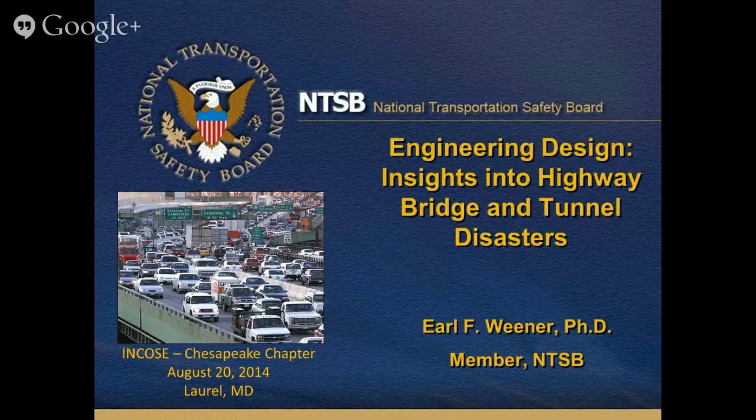Now the NTSB, let me start off with a word from our sponsor, if you will. Most of you are probably not familiar with the NTSB other than what you see in a newspaper: some disaster happened, NTSB is sending investigators. We're a small agency, about 400 people. We've got a very highly skilled workforce. We've got a lot of Ph.D.s, M.D.s, and so forth.

But as a small agency, we report directly to Congress. That keeps us a bit out of the politics. The agency is run by a collegial board of 5 board members, 4 at the moment. Board members are appointed by the President and confirmed by the Senate. We have fixed terms that rotate every year.

Somebody's term runs out, so that helps insulate us a bit more from the politics in Washington, D.C. But our charter is to investigate accidents and provide improvements for safety. So by safety, we're often thought of as being the aviation safety board, but in fact we cover all modes of transportation, as evidenced by the title here. We're going to talk about tunnels and bridges and how engineering can go awry and end up with a disaster.

So our stock and trade are safety recommendations. We don't own any regulations. We don't own any policy. We can't make anybody do anything. So the safety recommendations we come up with are put in place by arm twisting, seduction, coercion, however we can make a safety improvement. By law, we are to investigate and determine a probable cause of all aviation accidents, and significant accidents in other modes: rail, pipeline, highway, marine. So we have specialists and divisions in all of those areas. That's a little bit about the NTSB.

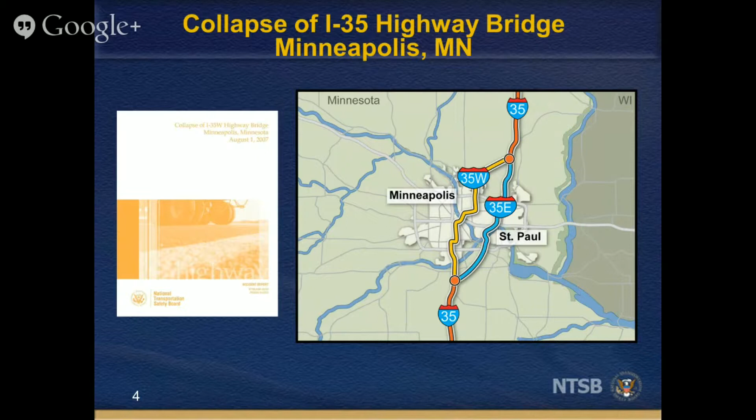Let me start with an accident that happened in 2007 in Minneapolis, August 1st, 6 o'clock in the evening. Interstate 35 West runs through Minneapolis along with 35 East. It runs right near the downtown district. The bridge over the Mississippi River at that point is what we're going to talk about.

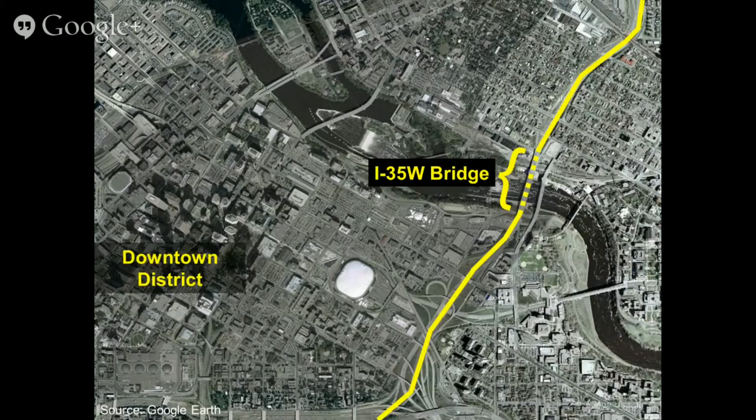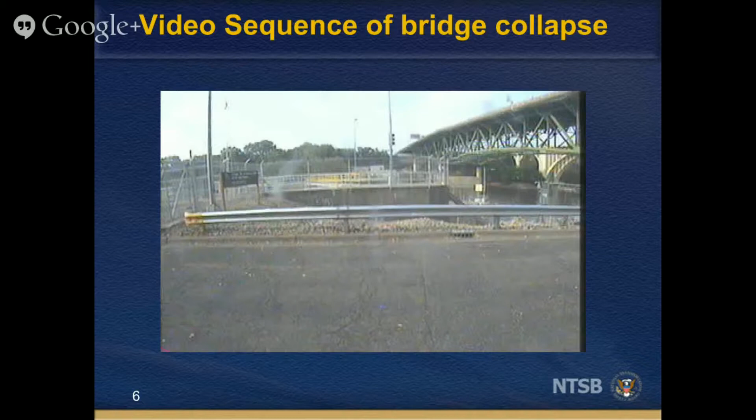Unfortunately, when I tried the presentation, it looks like some drivers got misplaced, so I can't play a video. But we were fortunate enough to have a video that started just after the bridge began to move and followed it through the river. Let me point out one thing: as you look at the shape of the bridge, notice the little dip here — that's where the collapse started. That's the part that is falling initially, and we'll talk about that in a lot more detail. This camera was a surveillance camera; we don't often have the good fortune of having this kind of information.

This is what it looked like. The bridge overall was about 1,900 feet long from the approaches to the north all the way to the south. The center section that fell into the water was 456 feet long, and it fell 115 feet into the water. But you can see other parts of the bridge, particularly those parts that were on rollers for thermal expansion. Those parts kind of folded up or fell over.

There were 13 people who died, 145 people who were injured. There were 111 vehicles on the bridge at the time of the accident. 17 of those were fished out of the river or were on the part that fell into the water itself.

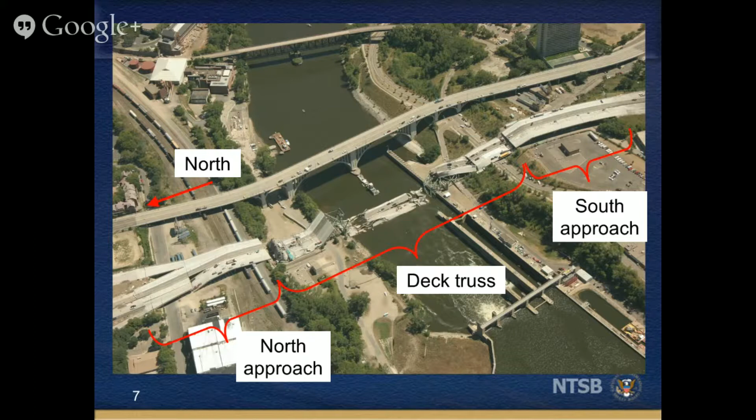The center section of the bridge, basically the center half, you have a quarter in the north approach, a quarter in the south approach. The center half is about 1,000 feet long. That's the section that's the truss bridge.

Now, let me talk a little bit about truss bridges. In a pure truss bridge, all of the components are either in tension or in compression - pure tension, pure compression. In an ideal truss bridge, all of the connections are pin joints so that there's no bending moment transferred from one to another, so everything is purely compression and tension. With a large complex bridge like this, you can't really do that, so you have what you call gusset plates, which you bolt or rivet the diagonals and the verticals and the chords to, and so you get some secondary transfer of moments in that process.

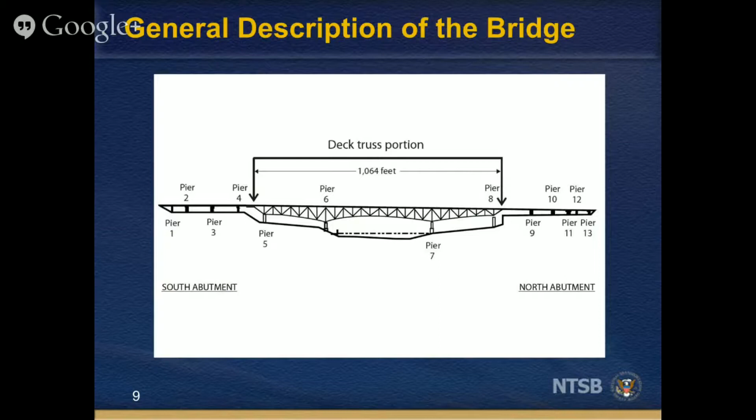There were 13 piers, 14 sections, but as you can see, the biggest section in the middle, the 500-foot long section, is one truss span.

The probable cause, as you can see here - and I'll talk in more detail about how we got to that probable cause - is the inadequate load capacity due to design errors in the gussets at the U10 connection, which I'll define in a moment, by the engineering consulting firm responsible for the bridge design. The failure was substantial increases in the weight of the bridge resulting from bridge modifications, as well as traffic and concentrated construction loads on the bridge the day of the collapse.

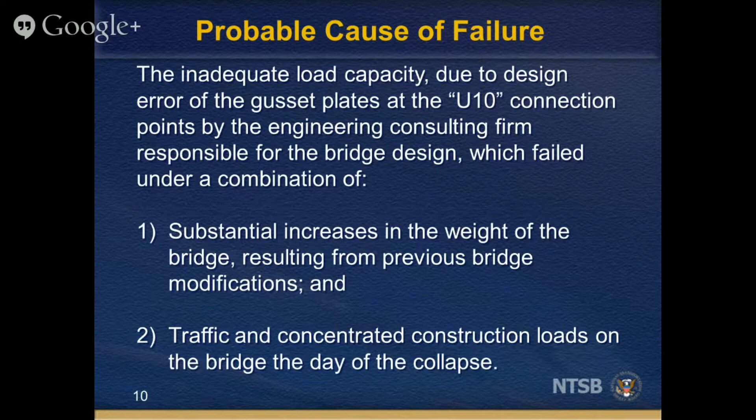Contributing factors: the design error wasn't caught by the firm's quality control. The gusset plate calculations were assumed - they weren't made. I don't know how many of you have encountered situations where you assume something is adequate strength or adequate capability, only to find out that that's the one thing that bites you.

Contributing to the accident was the practice of giving inadequate attention to gusset plates during inspections and excluding them from load rating analysis. I'll show you in a moment some pictures of gusset plates that were bowed, which should have been a tip-off that the plates were not within the design loads.

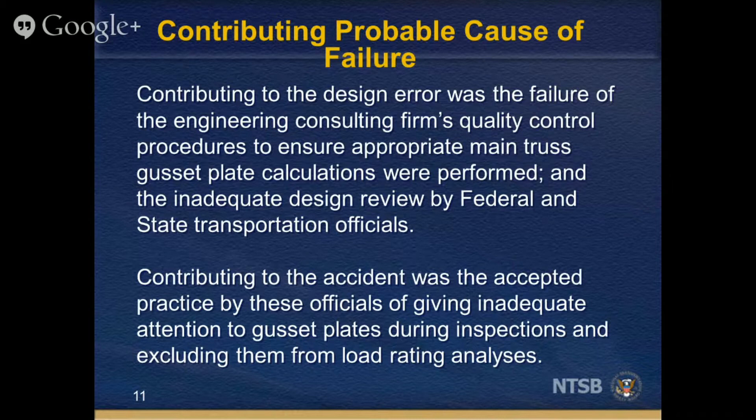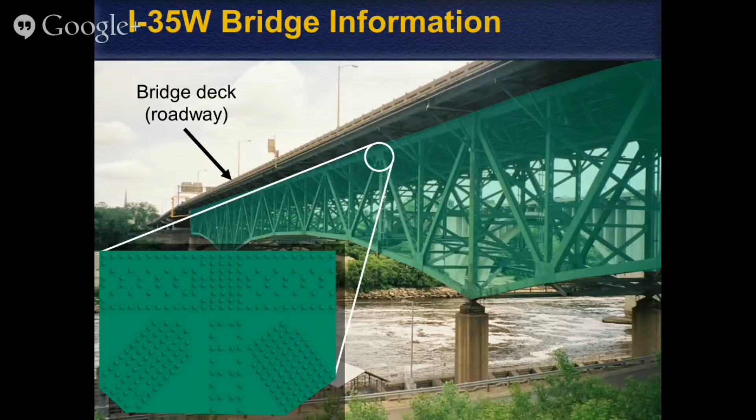This is just a bigger picture of the gusset. The gusset on this bridge - this is a piece of steel that's about 9 feet in width and about 6 feet in height.

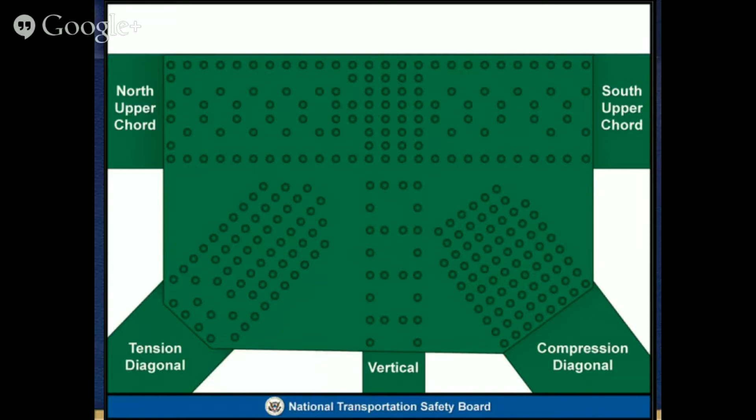Now the bridge was initially designed in '64, put into service in '67, and 10 years later they decided that they needed to provide some more protection for the rebar in the bridge deck, so they added 2 inches of concrete on top of the roadway that they had. That was about 3 million pounds, which increased the load on the bridge by 13%. Kind of creeping requirements - you've never encountered that before, I'm sure.

In '98, they had to put some improvements to the medians and the barriers on the outside railings. That added another 6% to the dead load on the bridge. So now you've got about 20% more load on the bridge than what it was initially intended to have. Obviously, there was some design margin in there, but by the time the accident happened, the traffic on that bridge was more than double what it was intended to have.

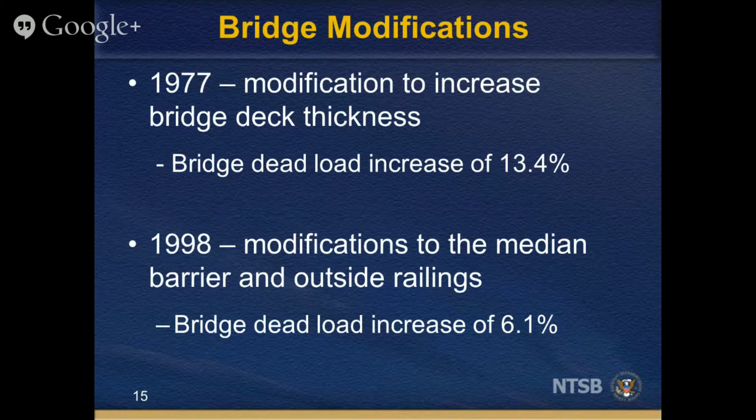In the particular case of the accident day, they were again working on the roadway, milling 2 inches of concrete off and replacing it with 2 fresh inches of concrete. So they had parked or accumulated on the bridge span about 300,000 pounds of aggregate, stone, sand, cement, and another 200,000 pounds of water, trucks, personnel, and equipment. So they had quite a load on that bridge.

And by the way, notice where that sand and gravel is, right over node 10. Now, somebody had asked, is this okay to do? And the answer was, oh, sure.

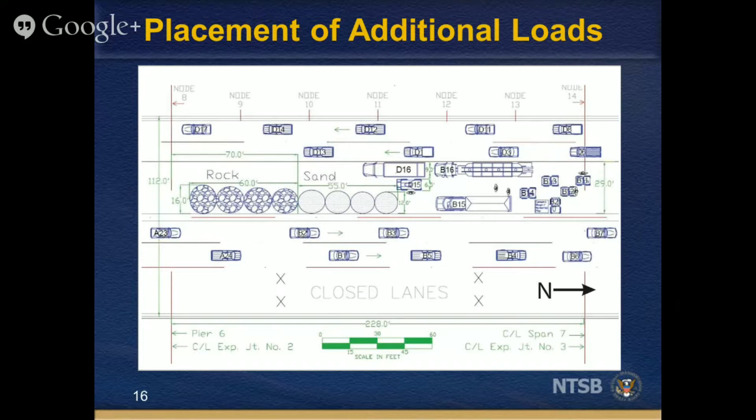So that's the setup. You've got rush hour, you've got 2 lanes closed in both directions, so you've got the rush hour traffic plus all of this aggregate on the bridge. This just happened to be taken that day of the accident. One of the police helicopters or traffic helicopters took the pictures, so this allowed us to verify basically what was on the bridge.

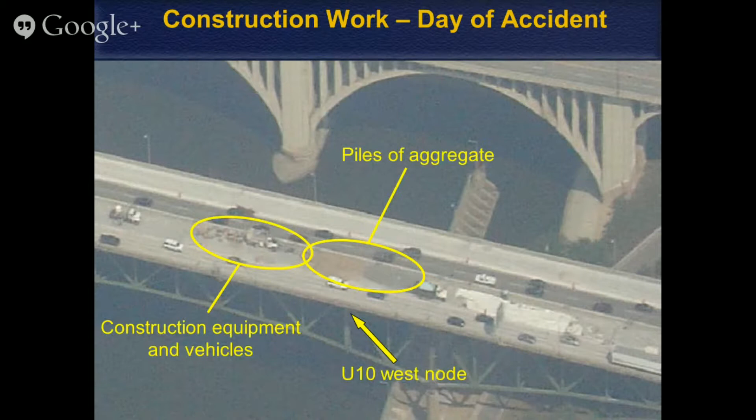The gusset plates were assumed to be strong enough, and that was pretty much standard practice in civil engineering for bridges at the time. Gusset plates were always assumed to be stronger than the members that they were tying to.

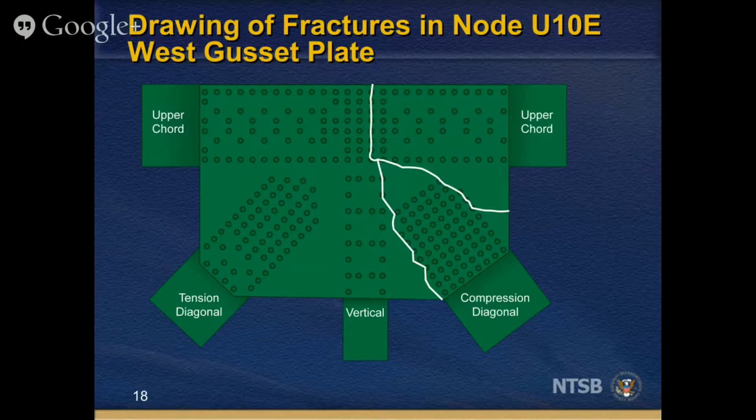So this is the initial compression failure, tension fracture. Now, one of the things that was not done was any sort of analysis of the gusset plate. We, at the NTSB, decided to do a finite element analysis of it. So along with New York College, Federal Highway, and Dassault Systems, did a finite element modeling of the gusset plate.

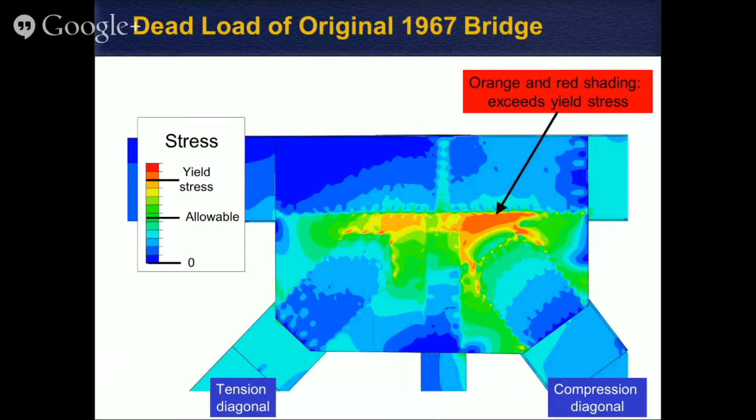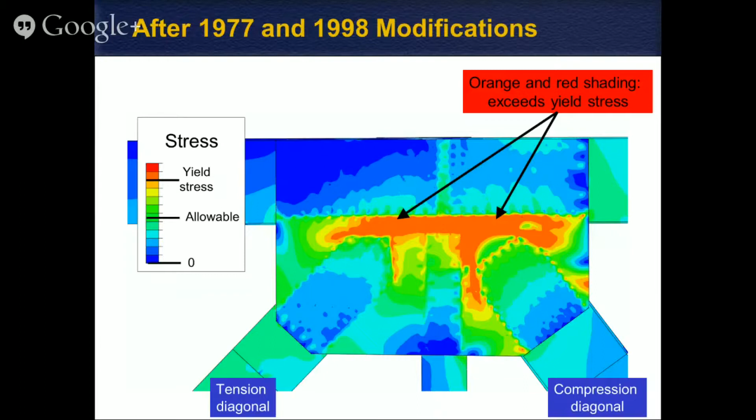But if we look at after the 1977 and '98 modifications, which added about 20% dead load onto the bridge, you can see how this is turning into basically a plastic flow in this area of stress, exceeding yield stress. Now, if you add the loads at the time of the accident, you see a very large area, and you see it coming down to the sides and going off to the edge. And by the way, there were no edge stiffeners on this. This is just a half-inch steel plate, so nothing keeping it from bowing other than just the integrity of the plate.

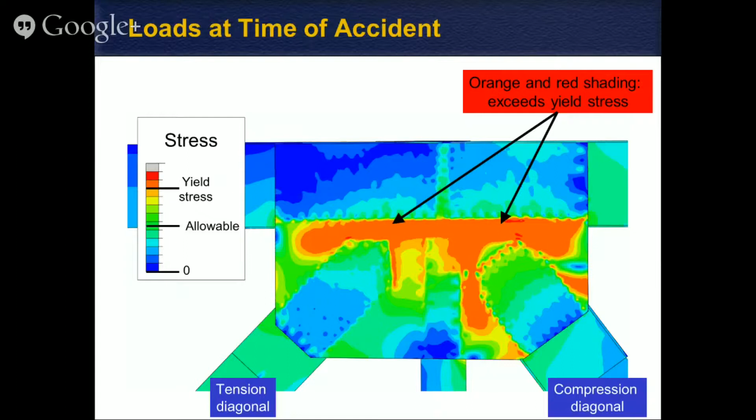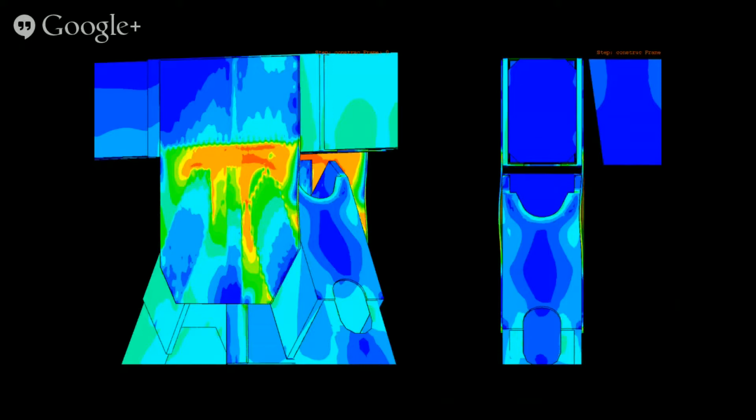So this is the area that gave way. If we look at it from the side, basically this is a diagonal, this is an end-on view. Notice the gusset plate here has started to bend. And of course, once it starts to bow, it's lost its structural integrity.

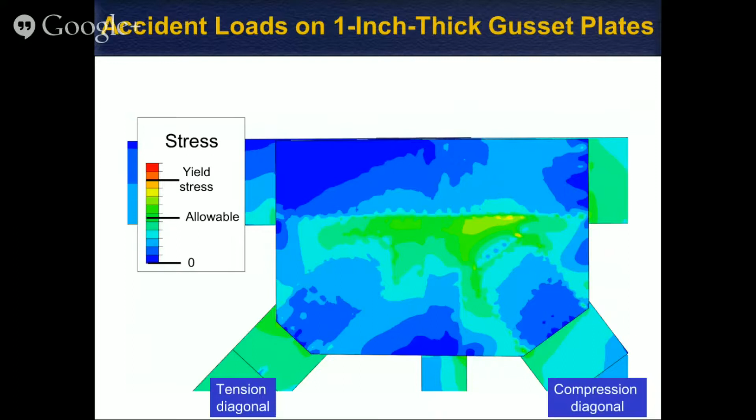Had it been 1-inch thick instead of half-inch thick, these would be the loads at the accident time. This is what it should have been. Again, this was an assumption that half-inch gusset plates were thick enough. In some places, they used 1-inch thick gusset plates. This particular one, they didn't happen to do that.

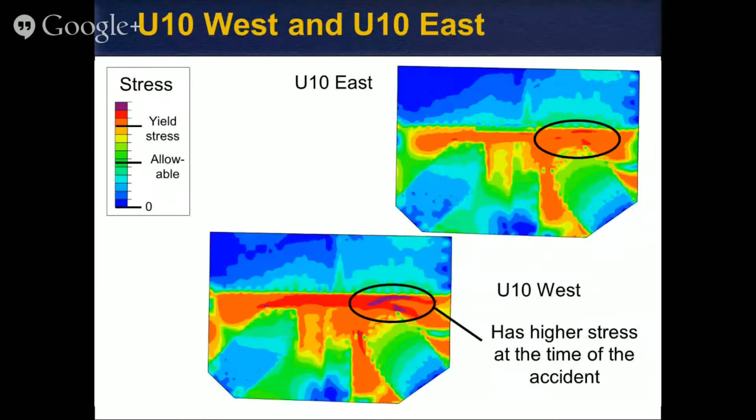Now, as I said, this is the upper 10th node, east side and west side. The west side is where the aggregate was placed, so that had a higher load. And you can see here where the load was, in fact, in the plastic flow. That's the highest stress.

So this is what happened. That moved to the side, that caused it to buckle, that then caused the whole bridge to pull away, and the whole thing came down. The fact that there were not more fatalities is really astounding.

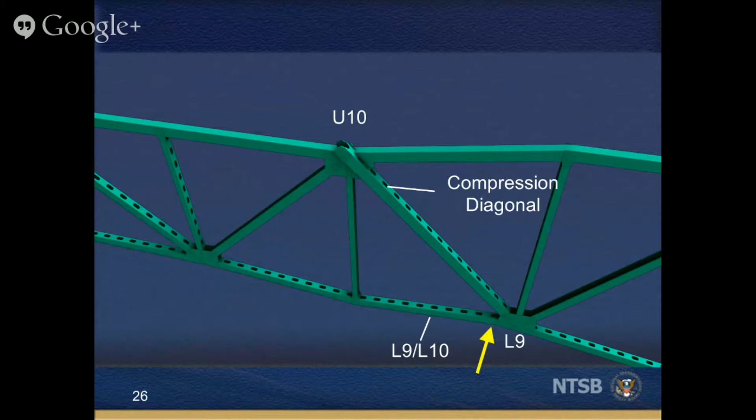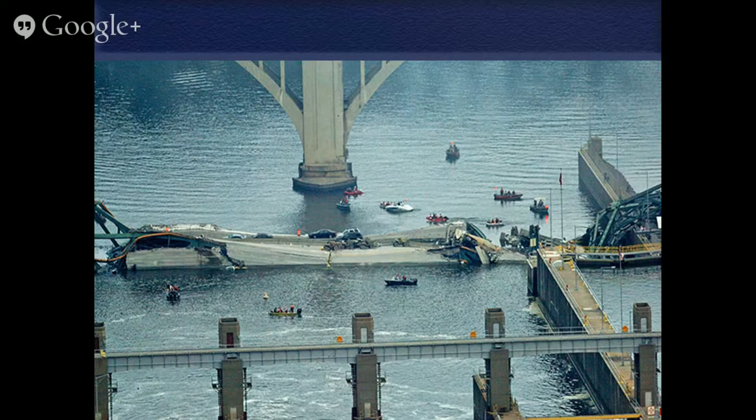This is what it looked like. There were 17 automobiles either in the water or on this section of the bridge. And the 13 fatalities occurred in this area.

So how did the bridge get designed this way? There were plenty of people who had design standards: the Association of State Highway Officials, American Association of State Highway Officials, and then the American Association of State Highway Transportation Officials, changed from AASHO to AASHTO - you can kind of see why they may have made that change. Between AASHTO and Minnesota Department of Transportation, that's where the bridge design requirements came from. There were also some construction information standards from the Federal Highway Administration as well as from MDOT.

This was a complex enough structure that they went outside and hired a consulting firm to do the project management.

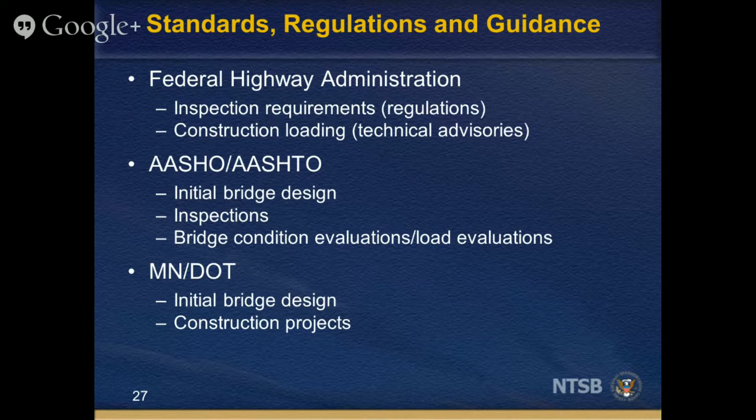You know, the interesting thing about rare events is the propensity for people to explain them away. Every remote event can be explained away to somebody's satisfaction.

So the University of Minnesota, along with a contractor, took all of these pictures, gave them to a consulting engineer. He looked at them and he said, oh, that must have been a fit-up problem. Again, just explained it away.

So if we look at it in terms of missed opportunities, opportunities to have found the problem before the catastrophic failure, the design, construction, and inspection guidance focused on members and structural elements only. So the diagonals, the chords, the verticals were what we're focused on, not on the gusset plates.

As I mentioned, the bridge safety inspection engineer noticed but made assumptions about the bowed plate and just didn't document it.

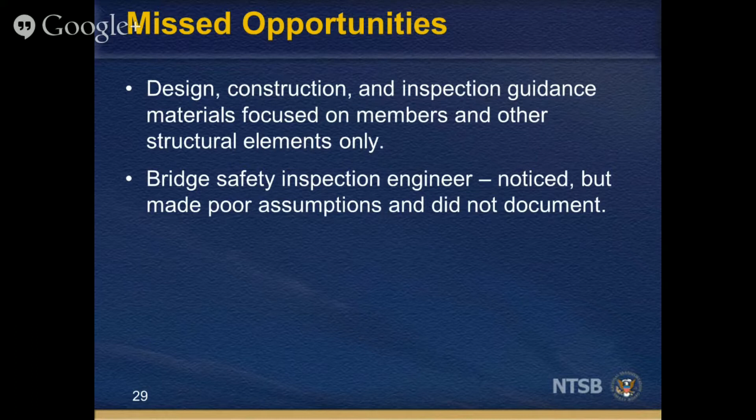And there was a decision to allow staging of the sand, gravel, cement, and the equipment on the bridge deck.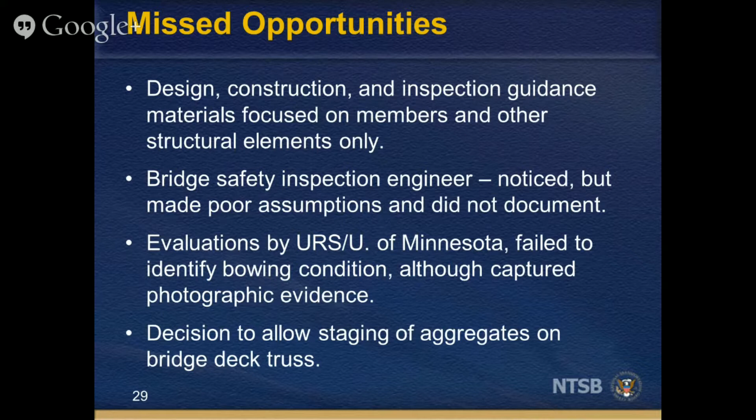It's interesting once you have an accident to then start looking around to say what happened in this accident. Are there similar bridges around? Are there similar situations? And in fact, there were quite a number.

The recommendations to take a look at the gusset plates, not only from the strength side, make sure the design was okay, but as the structure rusts, the plates, some of the strength, some of the material rusts away, so you end up with a diminished capability in the gusset plates.

10 states had designs that were found deficient. And that's often the case.

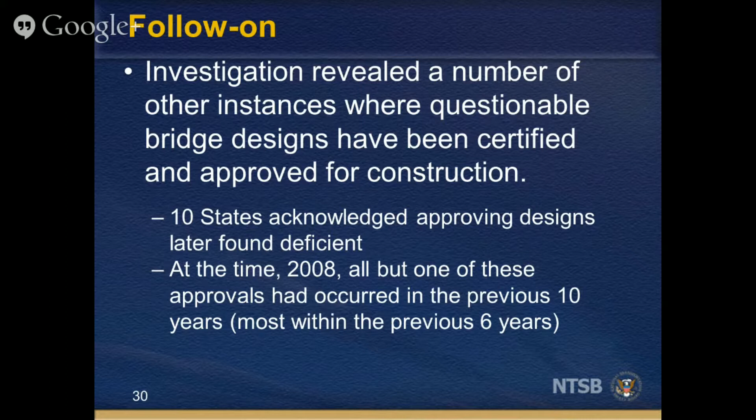So where were the problems on the system engineering V? You know, we started up here with the concept of operations.

The requirements for, or the anticipated loads on the bridge were underestimated. The traffic growth was underestimated. There was no requirement for looking at the design capability of the gussets.

That's really in the detailed design area. But in operation and maintenance, over the years, the bridge was inspected, but the problems on the bridge were not found.

So let me go from a bridge to a tunnel. I think most of you are familiar, have heard the term big dig from one time or another. It's the most expensive infrastructure project in the history of the United States.

It's also one of the, it went on much longer than what was anticipated. It went on about a decade longer than expected. The Central Artery and Tunnel Project is the official name of it.

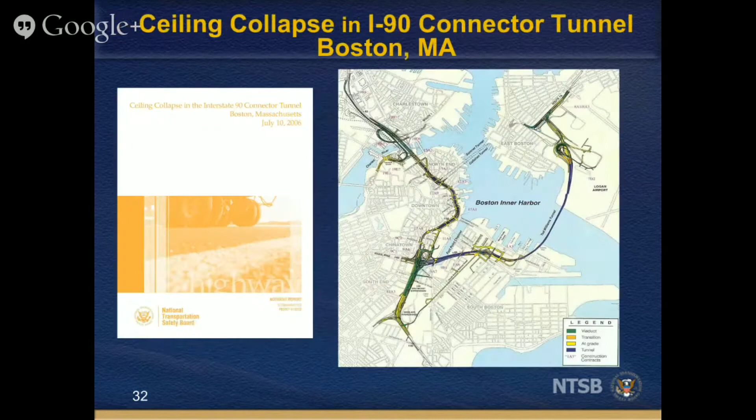It's a project to get traffic through Boston and then traffic to the airport through the Ted Williams Tunnel. And the D Street portal is where the accident occurred, and that's located right here.

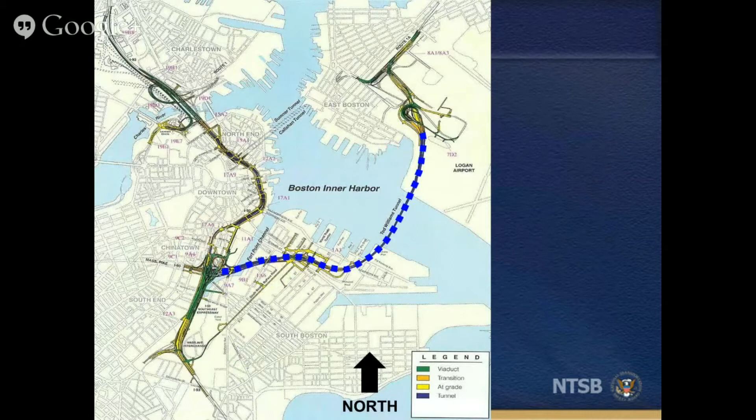It's on the way from, and in this particular case it was eastbound traffic. So you can see it connects I-90 to the Ted Williams Tunnel.

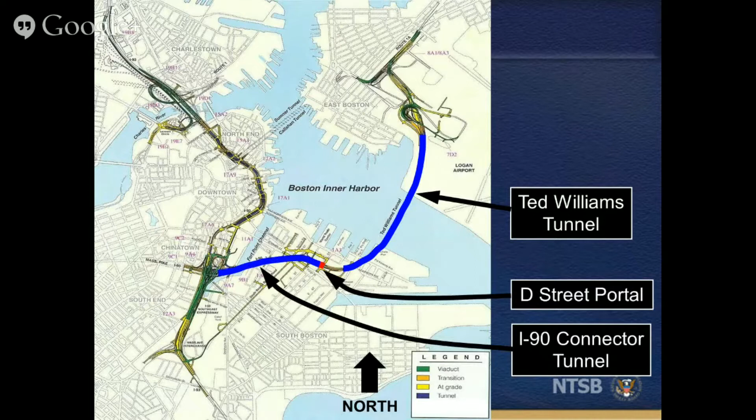From the air, this is the eastbound tunnel. 2 lanes of traffic here, 1 lane of traffic eastbound here.

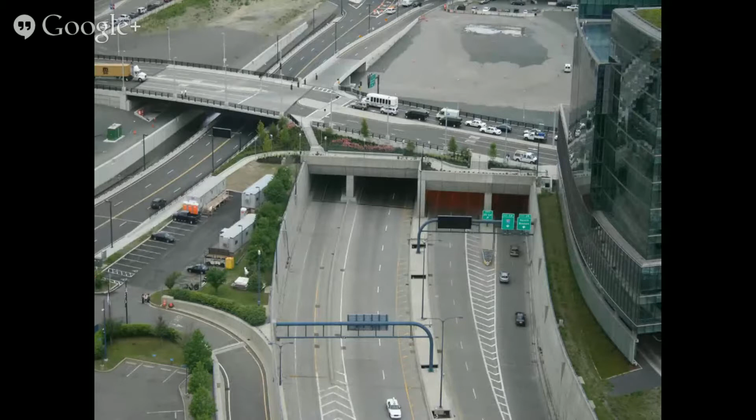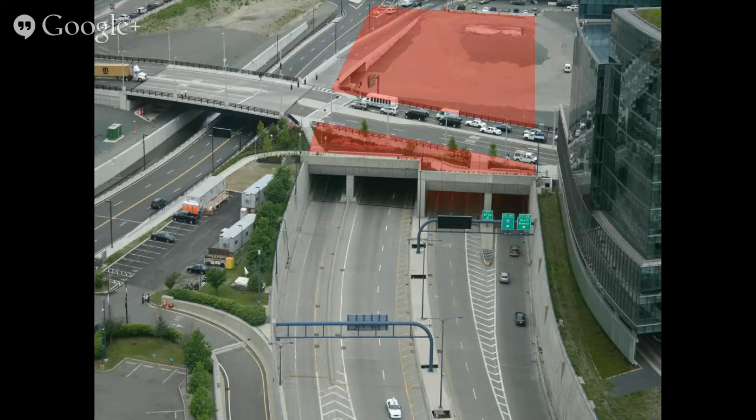The portal was actually a concrete pad, about 5 to 7 feet thick concrete. And it was used as a staging area early in the construction. But the name D Street Portal is because this is D Street, and it goes over top.

So 1 or 2 lanes in this direction, 2 lanes in this direction, 1 lane acceleration lane here.

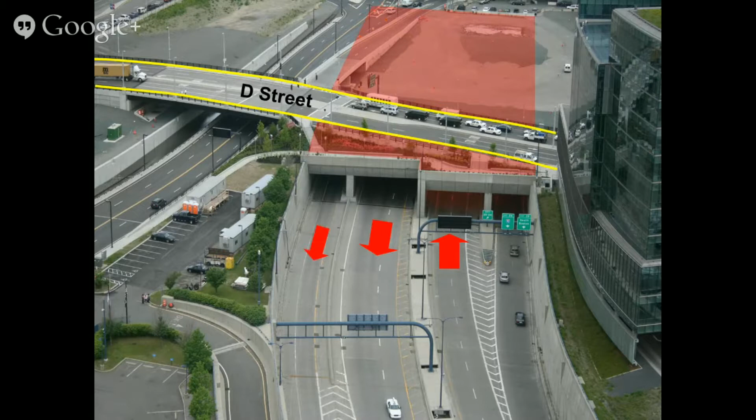If you were inside the tunnel looking toward the flow of traffic coming toward you, this is the single lane, this is an 18-foot wide lane, these are a pair of 12-foot wide lanes. You can see the ceiling structure here, and that's the real subject.

Now, this happened in 2006, about a year before the Minneapolis bridge collapse. I remember hearing news accounts of the ceiling collapse in the Big Dig Tunnel. And of course, my concept of ceiling panels were something like ceiling panels that you have here. They must be light. How could anybody get hurt with a ceiling panel like this coming down on your head?

These things are really like pieces of sidewalk. They're 4-inch thick reinforced concrete. Panels are typically 8 foot wide, 12 foot long. Some panels are 6 foot by 8 foot, weighing about 2,600 pounds. The full panel weighs about 5,300 pounds, so that's more than 2.5 tons.

They had to be that massive because this is used as a ventilation duct up here, with some fairly complex requirements for venting air out and through the vents around the sides.

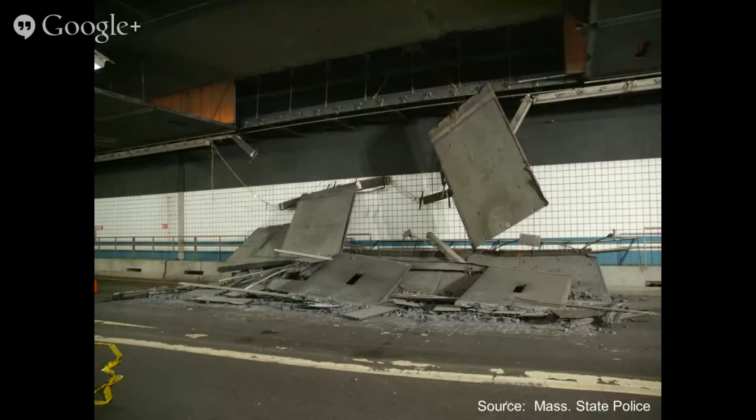This is what the collapse looked like. 10 panels came down. Here's one panel still hanging up. This occurred at 11 o'clock at night. There was only one car underneath that, but there is a car under here.

A 91 Buick. The passenger, the husband and wife, headed out to the airport. The passenger didn't make it. And neither did my laser.

Had that been rush hour traffic, like the Minneapolis bridge collapse at 6 o'clock in the evening, there would have been a lot more fatalities.

So what happened? Well, they anchored the ceiling in place with epoxy. But they didn't recognize ahead of time that the characteristic of epoxy was, under certain cases, the polymer can creep.

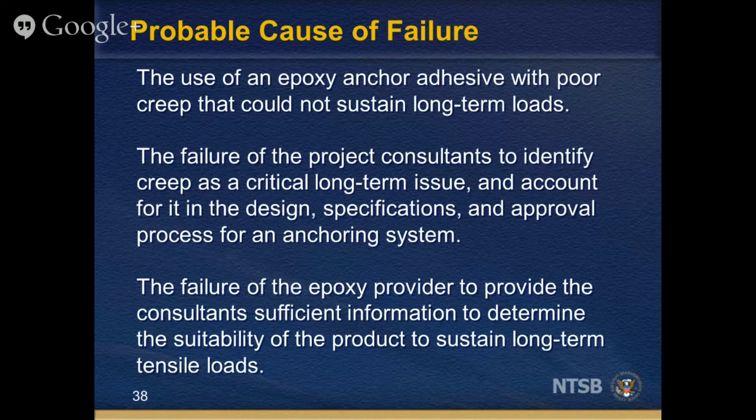Contributing factors was the unsuitability of the epoxy in previous anchor applications. They tested this out. In the process of trying to decide how to put the ceiling panels in, they looked at what they call undercut. You make a hole and then you cut in that hole, widening it so you can put an anchor up there.

So if you're going to hang a heavy picture, and if you're familiar with the term molly, you drill a hole, you have a wing clip kind of device that you put in, put it through the hole, it expands, and you now have an undercut. Or you can put it in by friction, an anchor that expands and holds by friction, or you can epoxy it in, glue it in.

So the decision was, because of cost considerations, to epoxy them in. They did a test and found that the anchors displaced after a short period of time.

So again, explaining away test results, they argued that, well, this is two-part epoxy, it's kind of difficult to mix. When you mix it up, you don't get a nice consistent mixed epoxy. So when you put it in a hole, you may have a poor mix, or you may have voids. You may have gotten air because you're doing this overhead, putting it into a hole that is open at the bottom.

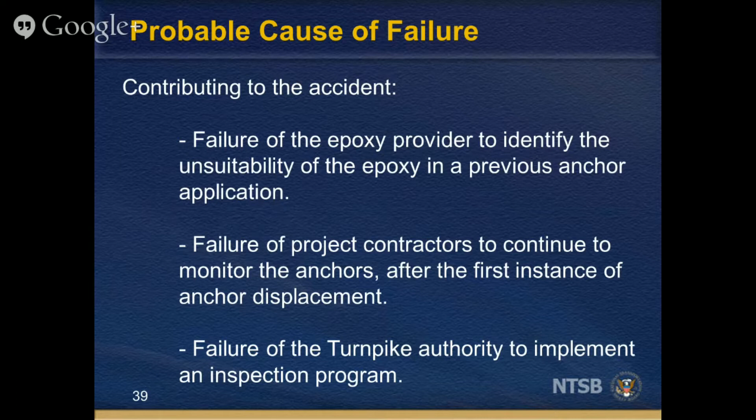Once they saw the anchors displaced, it should have been a flag to say we need to watch this much more carefully, but they didn't. They had an inspection program that was required. They designed the inspection program, but they didn't implement it.

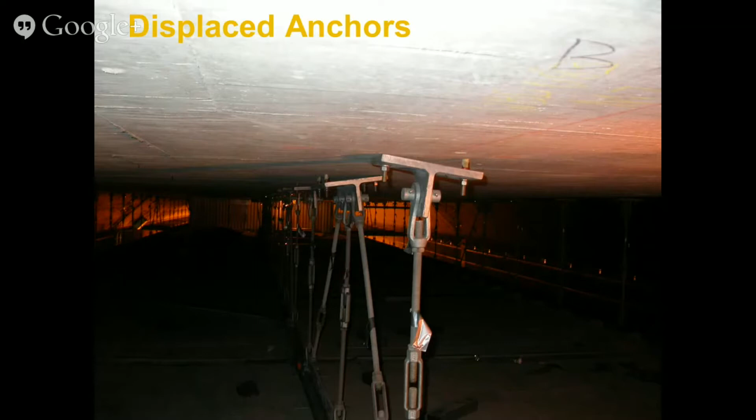After the accident, which happened on the eastbound tunnel lanes, the westbound tunnel lanes were examined, and here's what they found: a whole lot of the anchors. In fact, in one stretch of the tunnel, about half of the anchors were already displaced.

This is what the anchor looked like. A 5-inch hole, 3/4 inch, about a 5/8 threaded rod. The hole filled with epoxy, some air maybe at the top, then a seal plug, a polyethylene plug to keep the epoxy from coming out of the hole while it's curing.

So this already diminishes part of the anchor capability.

The epoxy provider was well aware of a standard set epoxy and a fast set. The fast set epoxy was preferred for the installation because they didn't have to wait nearly as long for the epoxy to cure. But the fast set epoxy, over a period of time, had a factor of 14 to 17 more displacement over time. Again, a polymer like epoxy, when under a continual load, can flow. It flows very slowly, but it can flow. The standard set epoxy doesn't flow as rapidly as the fast set, but they used fast set epoxy in the tunnel here.

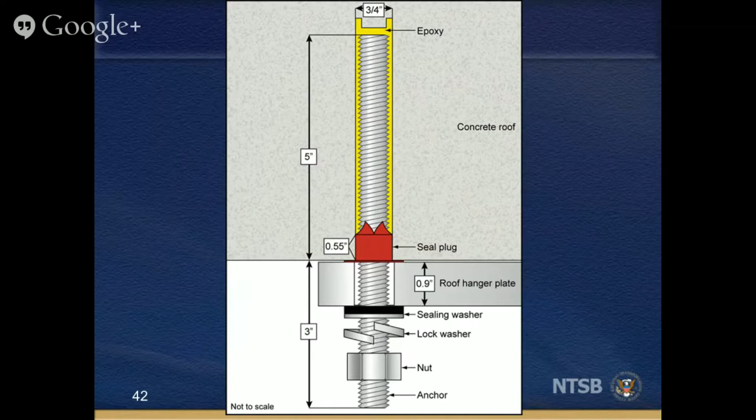So what were the opportunities? Again, the project consultant limited the choice of anchoring system. Didn't want to go undercut, didn't want to go to friction. Undercut is difficult to do. With friction, if the cement cracks a little bit, the friction against the sides diminishes, so the load capability diminishes.

So those were a couple of reasons why they decided to go with epoxy instead: lack of clarity on the types of epoxy available, that's fast set versus standard epoxy. Standard set might have been much more satisfactory, but probably not entirely.

There was insufficient approval review by the design consultant, which failed to identify the type of epoxy and note the limitations on its use. The epoxy manufacturer did provide literature about creep. But again, once you discover that what you got isn't performing right, you don't identify what the cause is, and instead make up reasons for why you're seeing what you're seeing and merrily go on your way.

So they saw anchors coming down or displacing, but they didn't take action and did not resolve it.

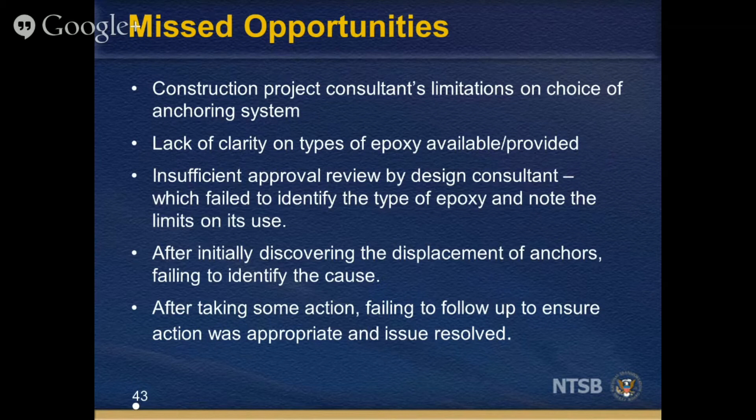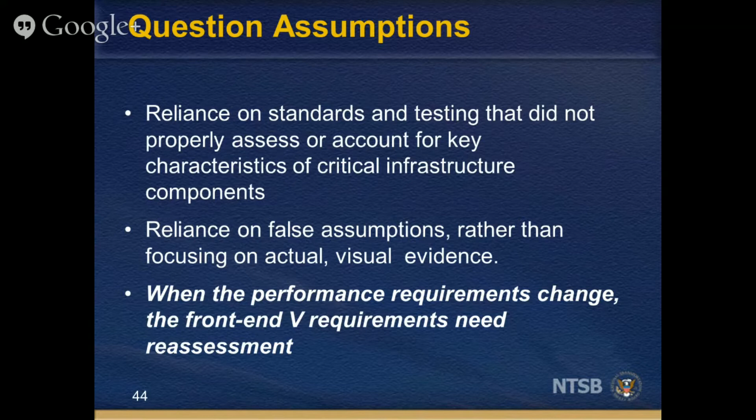So, question assumptions — relying on standards and testing that did not properly assess or account for key characteristics of critical infrastructure components, basically the epoxy. Reliance on false assumptions. Again, when the performance requirements change, the front-end requirements need to be reassessed.

So there were plenty of opportunities here. Requirements should have been much more clear about what the properties of epoxy were, or what the requirements were for anchoring over a long period of time. There were mistakes in the detailed design because somebody knew that epoxy wasn't the right thing, particularly the fast set, but they used it anyhow.

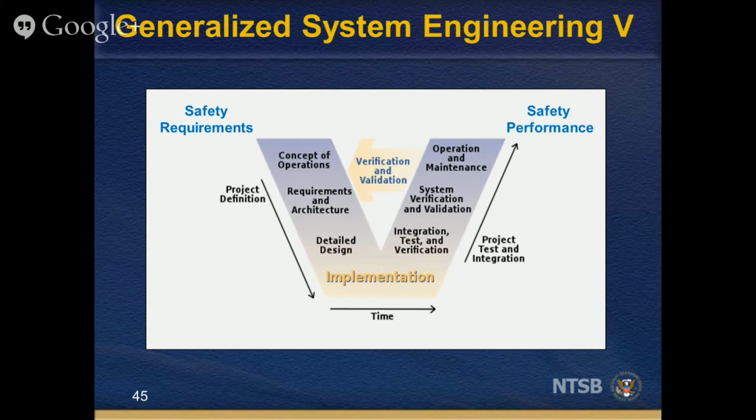They did a test, but they rationalized the test results away. So again, the systems engineering process is really appropriate for civil engineering problems as well. So with that, I'll be happy to take a few questions.